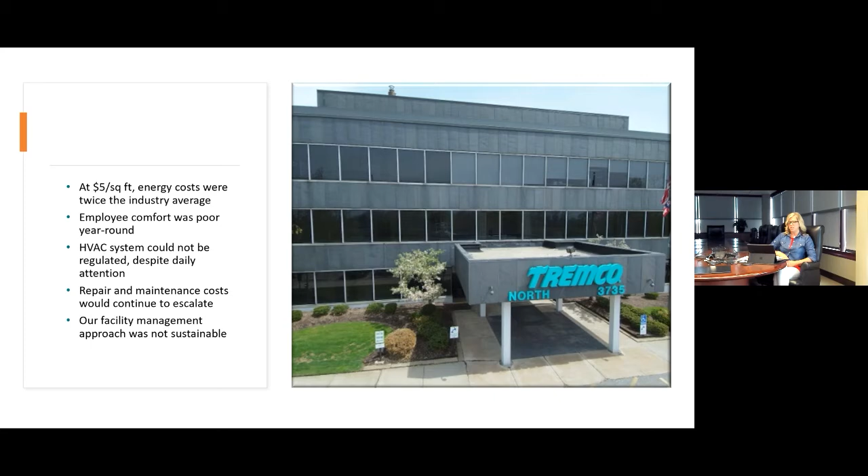So we knew we had to make some changes, and here were some of the goals: we wanted to reduce energy consumption, reduce greenhouse gas, improve employee comfort, extend the building life cycle, and achieve LEED Gold.

And so what we were able to do was do just that. If you're interested in learning more about that LEED Gold process, the information can be found online. We also have a great AIA-approved course that we can share on that whole process, and I think it's really great to see how it went. What's even more interesting is this was 10 years ago, so imagine all the improvements that can be made today, maybe even with technology that can assist.

Kevin, how much were you involved in the LEED portion of this restoration, or this renovation?

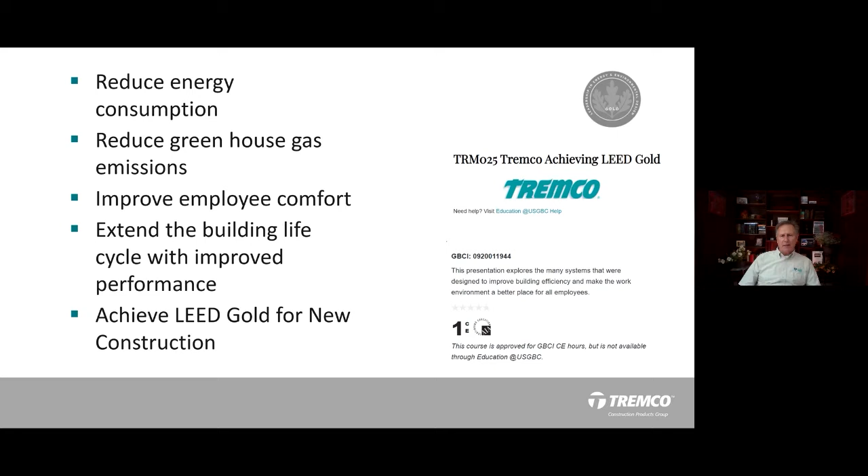Well, throughout everything—a lot—because everything we did had to be monitored and tracked. From hauling the trash away to recycling the slate, everything had to be tracked. I had to report to, I think it was URS, who was tracking it for us. So it was a good collaboration—they laid it out, but we reported to them on things that were happening.

And is this kind of reporting based on all the points and all of that? Did you get into that detail, or is it more just making sure you reported everything?

Well, no, we had to get into figuring out what points needed to be had. For instance, we had a bicycle rack—you get so many points for a bicycle rack, but in order to get those points, you had to have a shower. An interesting story was when I found out we needed to put a shower in, I had to go down into the basement and start measuring up this poor woman's office. She was looking at me like, what am I doing in here? I didn't have the heart to tell her she was going to lose about 5 feet of her office space. So it was total involvement, figuring out what the points were and then how we were going to achieve those.

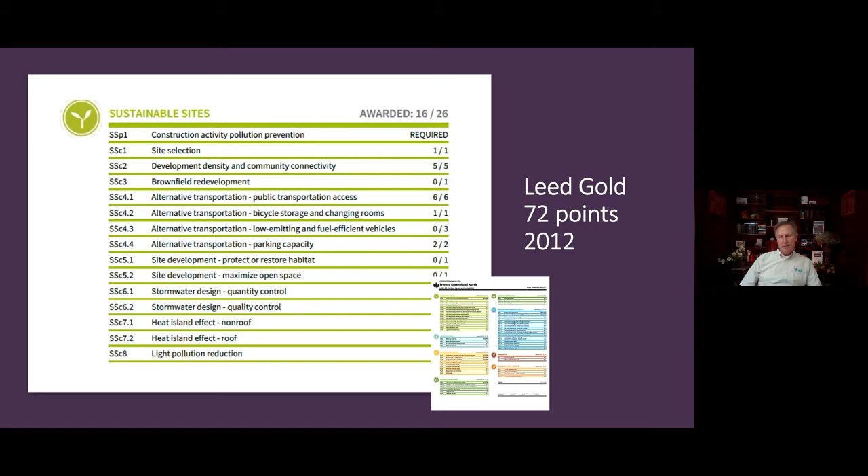So if anyone's interested in learning more, there's a whole scorecard available on the USGBC site. We did achieve LEED Gold—it was 72 points. To go platinum, you needed 80 points, so we were just shy of that. We were accredited for that in 2012, and I think the overall construction began in about 2010. It's pretty interesting—through the years, USGBC has gone through changes in their point systems, so if you aren't familiar with it, I suggest reaching out to them as a great resource for accreditation for your building.

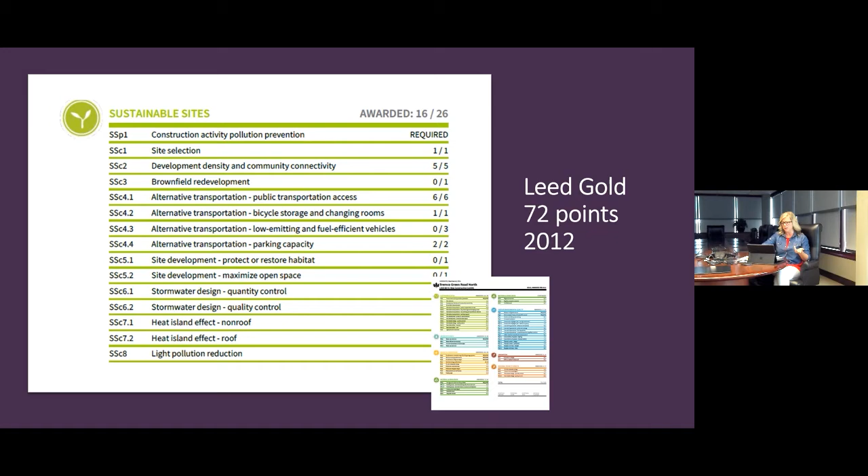So when we look at those retrofit results, we put a whole new Dryvit facade on. Before, if you remember, we had slate on steel. Now we have a continuous air barrier and moisture drainage plane. We took that building from having no insulation to now insulating it, and all that slate was reused as a walkway and on the vegetated roof. Were you involved in that part too, Kevin—the slate and how we utilized that?

To clarify, the slate on the lower portion where you see the windows stayed in place. Behind that was the steel structure covered with asbestos, so we had to deal with the asbestos attached to that space. The only slate we ended up using was on the penthouse, and that slate didn't have asbestos on it, so we had to be careful when we removed the asbestos on the lower portion.

The upper portion, the penthouse, had the slate that we took down, and that's where we made the walkway out of.

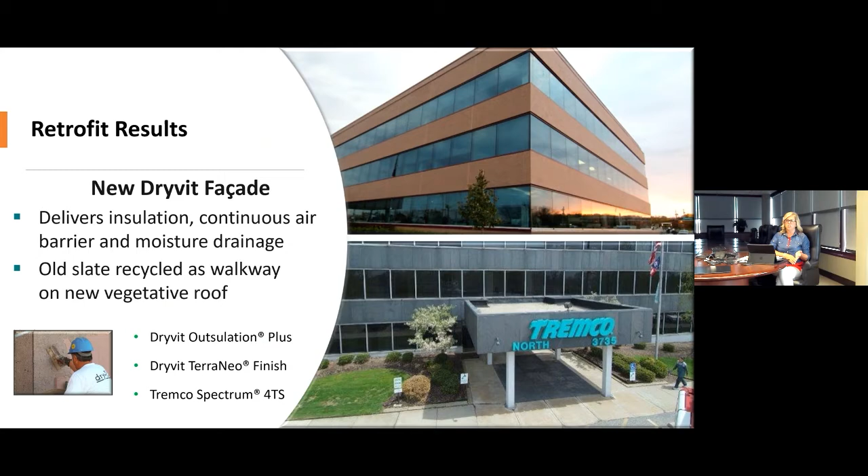Thanks for that clarification. I misrepresented that, because it would have been quite the job if you had to remove all the slate over the entire building to accommodate that. But this opens up all those capabilities as we look at existing buildings that are 40 or 50 years old, and how you can take that existing structure and give it a whole new look, not only aesthetically, but also getting energy efficiency, applying a continuous air barrier, and a moisture drainage plane, so you have a more functioning structure.

That was very helpful, and Dryvit was very helpful in that, because slate, if you don't know, has oils in it. So we had to do adhesion tests to make sure that what we were applying was going to stay. It was great with the sister companies coming in to help us out. Even Sealants came in and helped with the ETA for the windows, connecting to the slate before we put the Dryvit on. So it was a good collaboration from our sister companies.

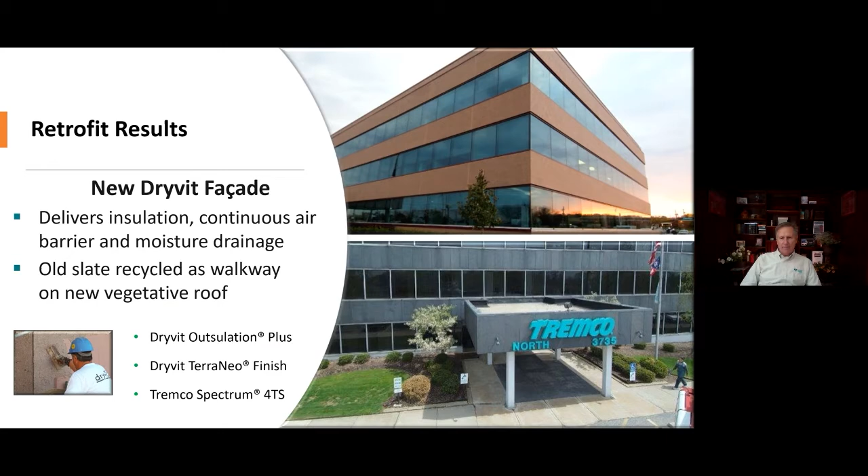I know you worked with a variety of different local contractors. Do you want to name a few that worked on this part of the project? Carroll Glass was the installer that we utilized. Kawneer was actually the window that was put in there, and the reason we utilized them is because they procure a lot of sealant material for their window systems. Kawneer was previously a partner with Sealants because they were buying our product to put into their window systems. The local installer, Carroll Glass, was the guys we utilized for them. The Dryvit people were Jess Sailor's group out of the Toledo, Detroit area.

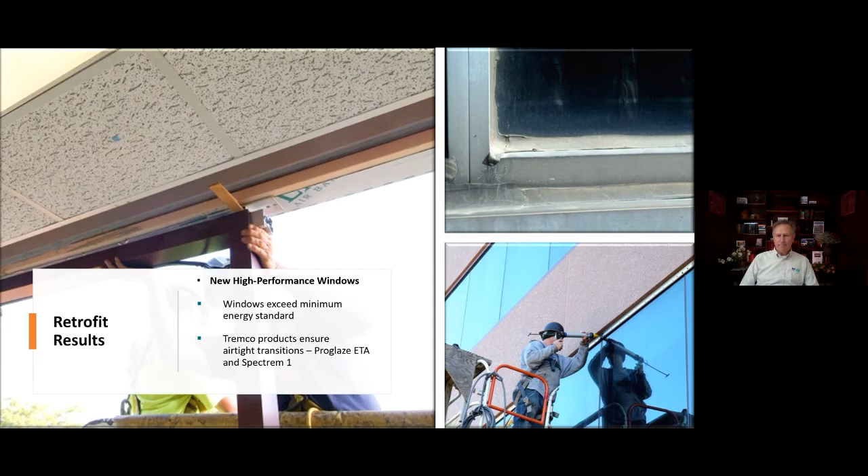Who's one of the better Dryvit contractors in the country. Wow, that's great. I wonder how they felt about utilizing our products on our building. That might have been a little uncomfortable for them, knowing we're watching their every move and also making the products.

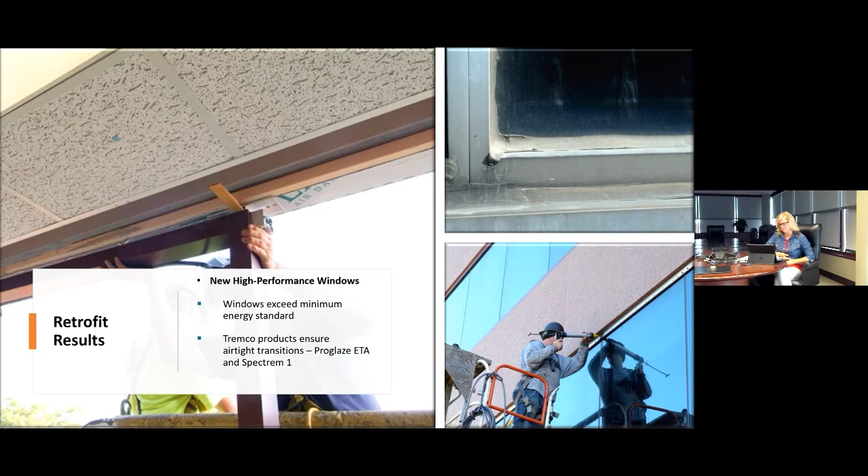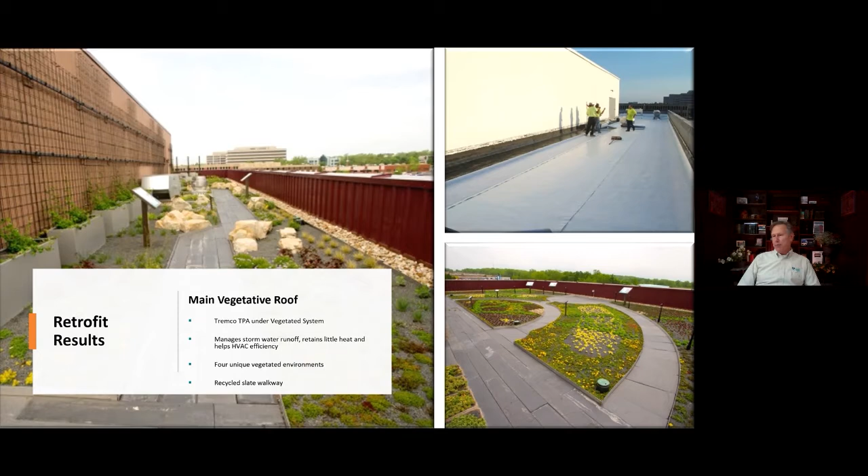One of the things to note is that we are capturing the water on that system. In a lot of areas now, you get assessed for hardscape - any water that goes into the sewer system, you're assessed based on the hardscape at your property. So by having a system like that, you're reducing the wastewater or the water that goes to pollute Lake Erie, which is a big help for the sewer systems.

Thanks for mentioning that, because that is a huge piece of it - being able to recapture it so we're not contributing to the wastewater.

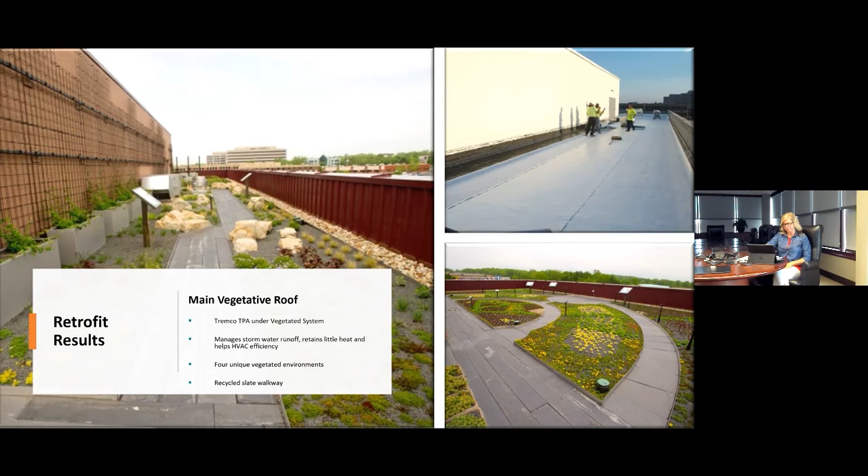Here's some more pictures of the roofing system, this highly reflective surface. Tell us what's going on here. This is on top of the penthouse. This is what I was referring to earlier, where we used several different systems so we could show our capabilities for different customers. This is a TPA roof that went on top of the penthouse.

Got it, so those pictures we just showed were the lower level of the roof, and this is on top of that area directly to the left of those pictures. Correct, just to have everyone understand that.

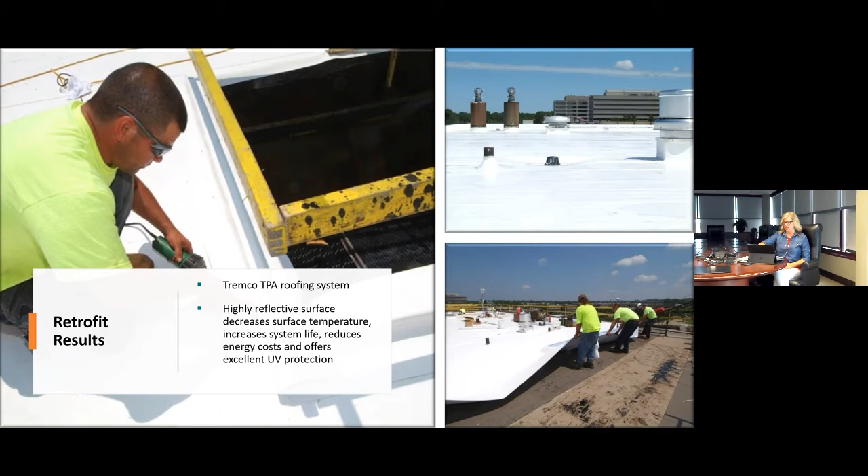As we continue on, some more pictures of the roofing system here with the Tremco Rock-It system. Correct. The one in the upper right-hand corner is the back canopy, and you're looking at the front canopy over in the lower right-hand corner there.

That's got that border around it, which will eventually be a vegetated roof. This is a great picture to show, as you would see on any type of construction site, the materials all around, the coordination—that was a key part of your job, the coordination and communication, as this was an active building, right? So the workers had to move off site during part of this.

What we had was two floors kept open at times, and then we moved one floor completely off site. We still had staff on site as we moved out, and eventually we ended up moving everybody out as we had to. At some point there was just one floor, and then we would move up and move people back in as we could. So it was a good coordination by the team.

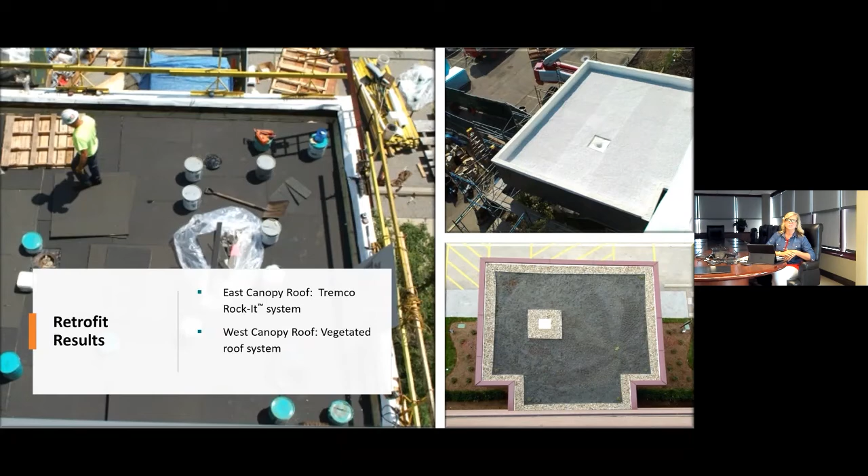That was the advantage of being able to use something like the Dryvit Outsulation, because you're going over that existing structure. So you moved people out when you had to handle the window part of it. Had you done more work to the exterior, we may have had to move people out even more often. That shows the feature of being able to add to that existing structure and get some additional performance so you don't have as much moving of that interior space.

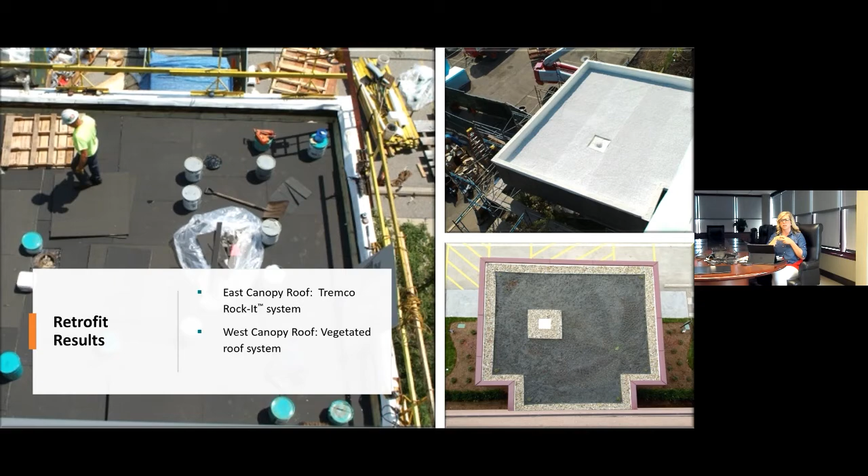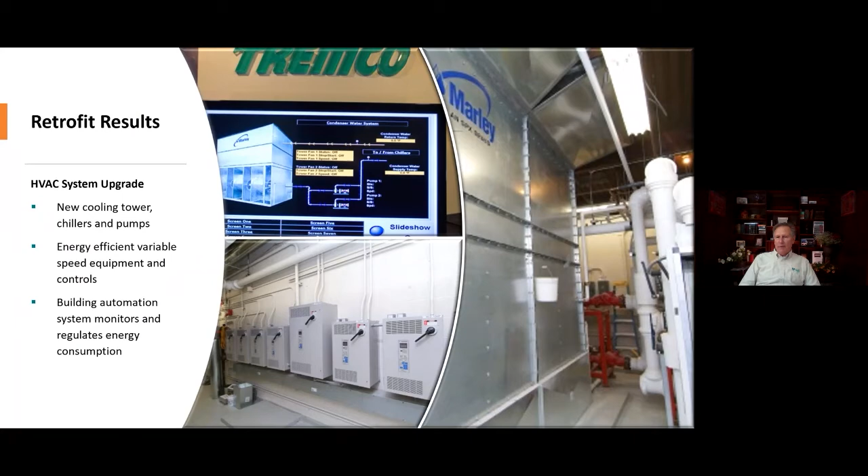Got it. And it was so interesting because right after we finished this, we took a lot of people through tours of these buildings. It was great to bring people through and explain this process. I think what's interesting is there's probably been a lot of people new to Tremco who may not have realized that all these retrofit steps were taken, and what this whole new building is able to provide to us in being able to talk about exactly how we can do renovation efforts in a structure.

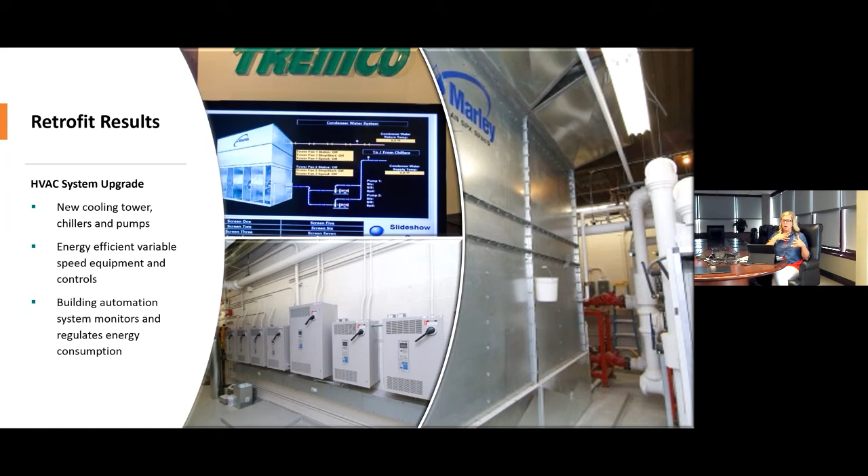So I know a lot of people were pretty excited about hearing this information directly from us today. Some of the questions coming in are about just that—what do you feel is the biggest design challenge, or the biggest lesson learned through this whole experience? I figured we'd answer that question real quick as we're going through these slides.

The challenge, from what I got, was what do we, as the end user, want the building to look like? How do we want it to operate? What do we want it to show? With us, we wanted it to be more like a showroom—here's what we can do. So I think we accomplished that.

One of the things we couldn't do was put a wind turbine up on the roof. In order to do that, going down into the structure would have cost a lot of money. So we wanted to put it up there, we looked at the cost, and we decided the best place to put it was in the back of the parking lot.

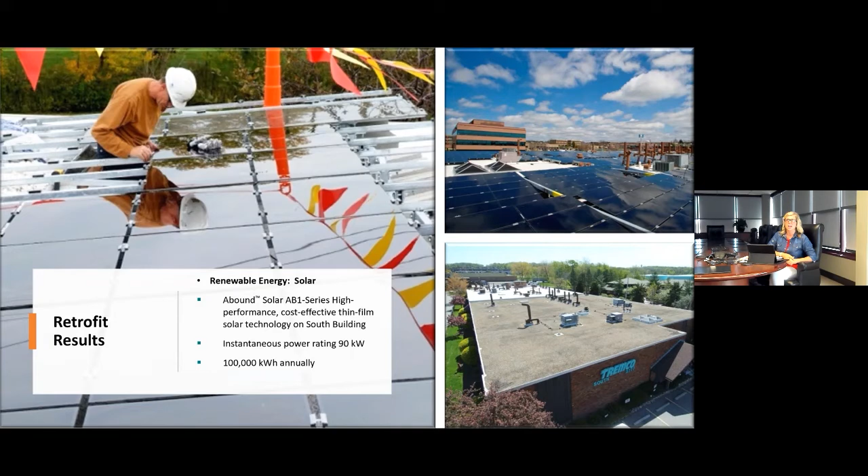So it was a team effort all the way from the top, all the way down to the guy sweeping the floor. Understanding that whatever that end goal is—I know right now many of us are working on different types of retrofits and renovations—I think that's a key part of it, making sure we're all on the same page about what our end goal looks like.

And I know this was part of it, right? We wanted to make sure we had some renewable energy. You mentioned the wind turbine, but there were also these solar panels. I know we've done a lot of work in terms of the clip systems that exist. There's probably been so many improvements—this was done between 2010 to 2012, so that's why we're celebrating our 10-year anniversary of that renovation. But I'm sure there's even more improvements you've seen through the years with different types of clip systems. Yes.

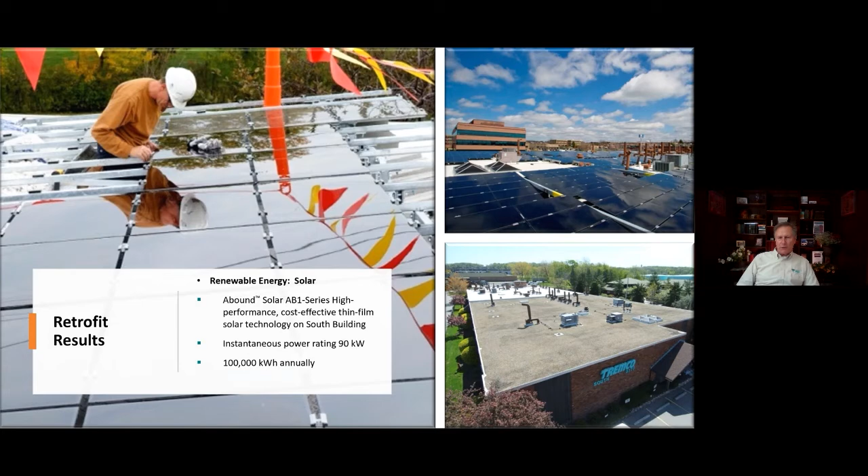With the clip system, we looked at the solar panels too, and that's where our method comes in—we go cradle to grave. The construction manager goes out with the engineer to look at the structure, so they're there from concept through implementation. We're out at the very beginning with the engineer, getting the drawings, crawling up in the ceilings, looking at the structure. Then when we're with the worker bees on site, if the engineer isn't there, we can help answer questions because we've gone and looked at everything with the engineer already. I think that's a key part.

So, Kevin, this whole month of July we've been focused on connectivity—how important that is to the overall performance of your structure, picking the right products, making sure they're tested as assemblies. The last thing you'd want to do is put in a clip system that isn't going to perform, or that introduces a lot of holes or issues in your building.

Thank you for bringing that up, it's perfect messaging on connectivity. We always have to think about what's coming next and how that affects existing systems. We had a conversation yesterday where a question came up about how we handle solar power, and whether we have experience with that. Thanks for bringing that up—yes, we do, and that's something we like to be part of, that whole cradle to grave approach across every aspect of the renovation project.

We talked a little about capturing renewable energy from a rainwater harvesting perspective in that catch basin. There are 6 cisterns that store 15,000 gallons of water for reuse. I know you touched on this already, but I'm sure there's more you'd like to add at this point.

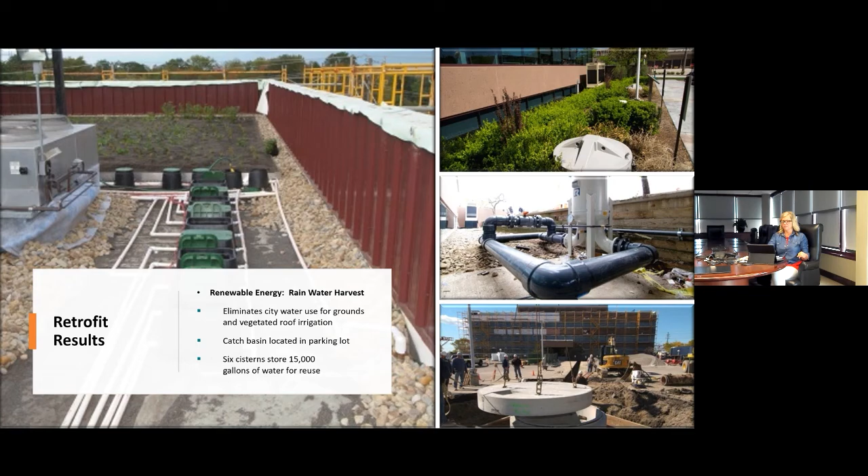And then daylighting—as we looked at the whole sustainability approach and LEED Gold, we knew there were improvements we could make for daylighting as well. We wanted to diffuse natural light and reduce our dependence on electric lights. Even in the room I'm in today, we've got great big windows—I actually have to close the blinds because it's so bright and sunny. What you're looking at is a stair tower that was added to the south building.

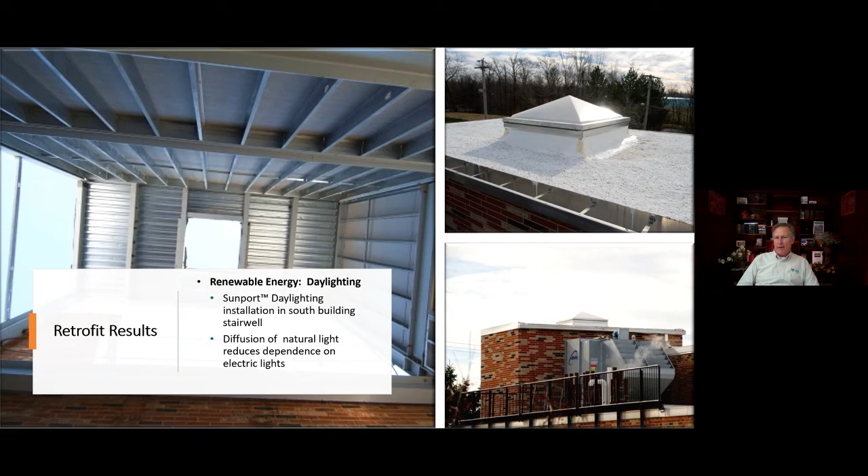That brick on the lower right-hand side is actually Dryvit. On the interior of that, we used Fibergrate as the stairwell. So what looks like brick is really not brick - it's one of our sister companies' products, a Dryvit product.

Right, Dryvit is obviously part of the Tremco Construction Products Group. Just one more example of the versatility of using those Dryvit products in the EIFS system, making it look like existing brick is a huge advantage.

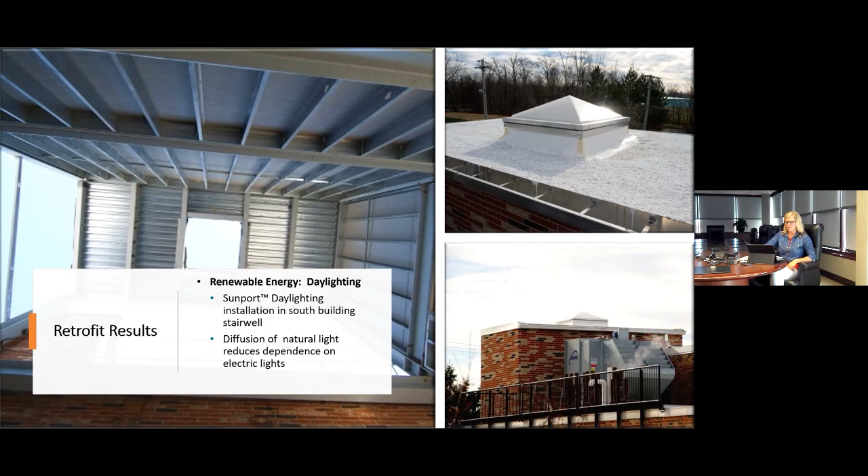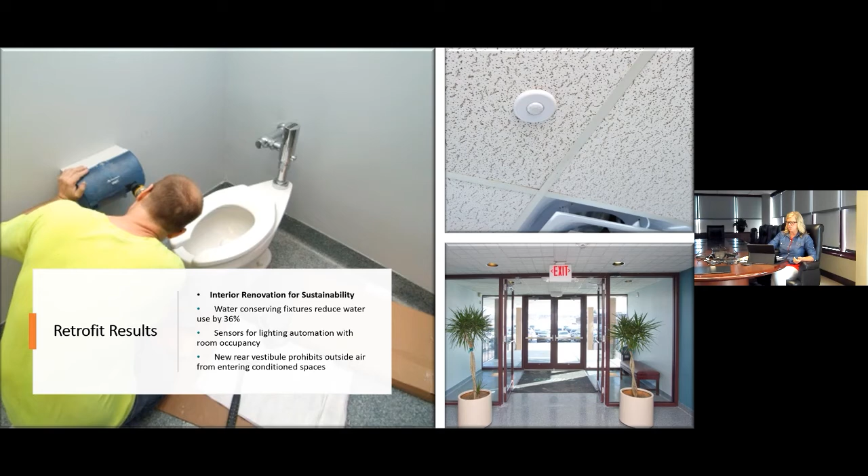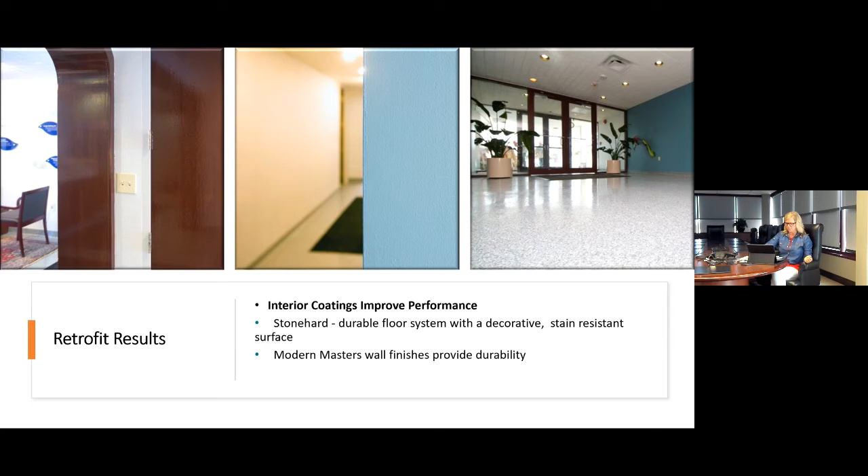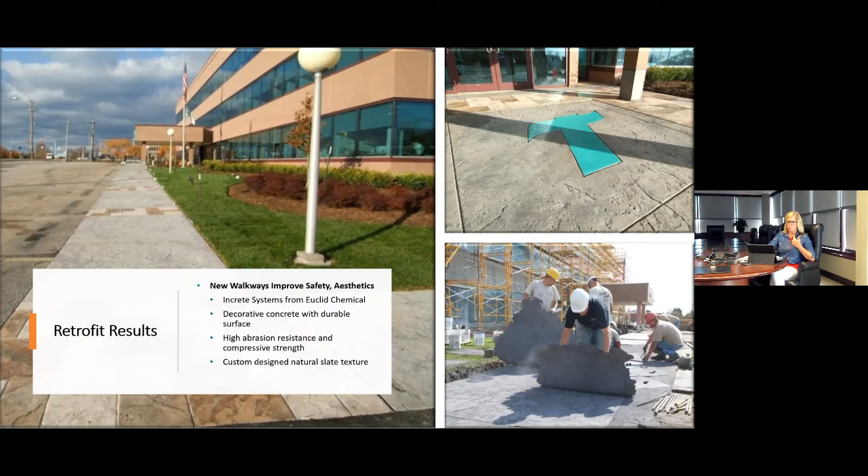And then, of course, there was a lot of restoration and renovation on the interior space, being able to put vestibules so that outside air doesn't easily enter the conditioned space. We had a lot of improvements on the flooring - we used Stonehard for their flooring system, some Modern Masters for the wall finishes. And of course, here's some of the aesthetics, pictures of the walkways, some of the work going on in the walkway, and the big slate front entryway with the Tremco T was a big part of all of that.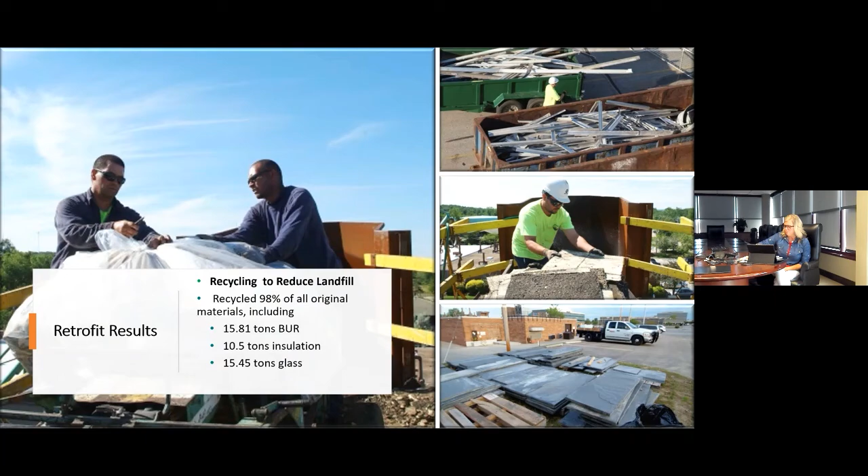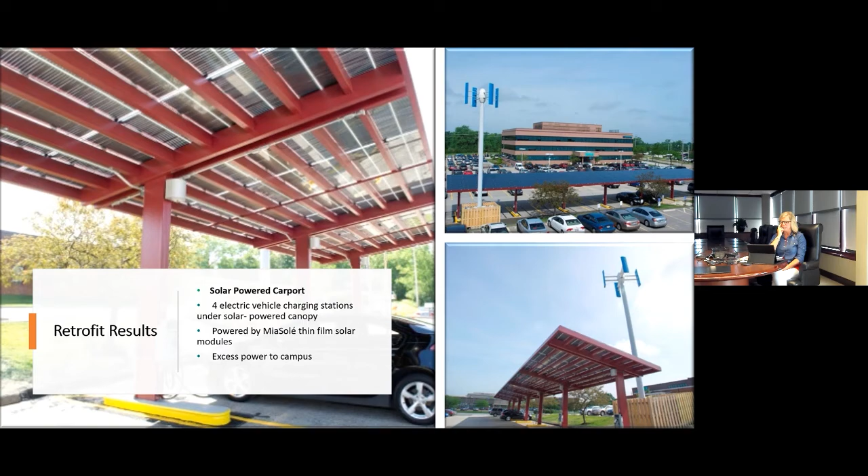We also had a solar powered carport, and back then we were like, come on, but we definitely have cars in the parking lot that plug into that on a regular basis, so we're utilizing different types of energy, collecting it solarly.

I think what's interesting is the building as it is today. I mentioned we used to do tours on a regular basis, and we'd still love to do that when we're able to have people through our facility. It always starts off with telling the story of the Tremco Incorporated headquarters here in Beachwood, and how important it was for us to invest in our own building and see those improvements in energy efficiency. We're able to walk people up through our staircase and show them that progression.

So this is a very quick video - I did it as a time lapse. I'm certainly not making it up the stairs that quickly, but imagine as you come to our facility today, 10 years later, seeing these improvements still working, still affecting our workability here in our facility. So let's take a quick look at that.

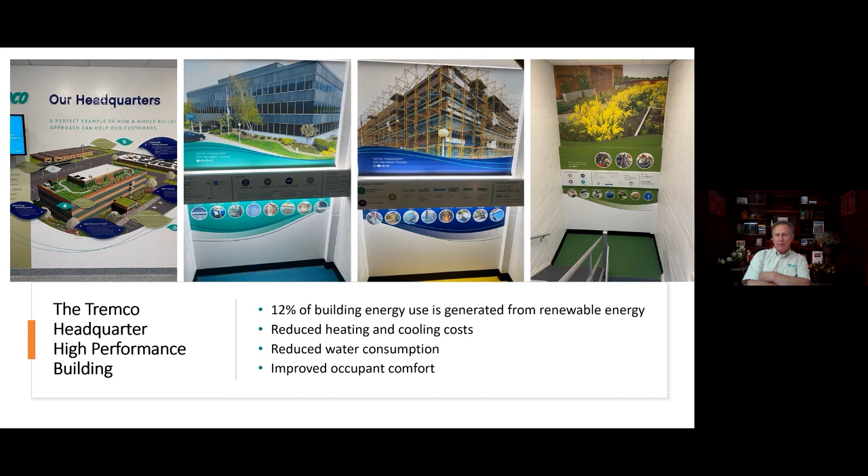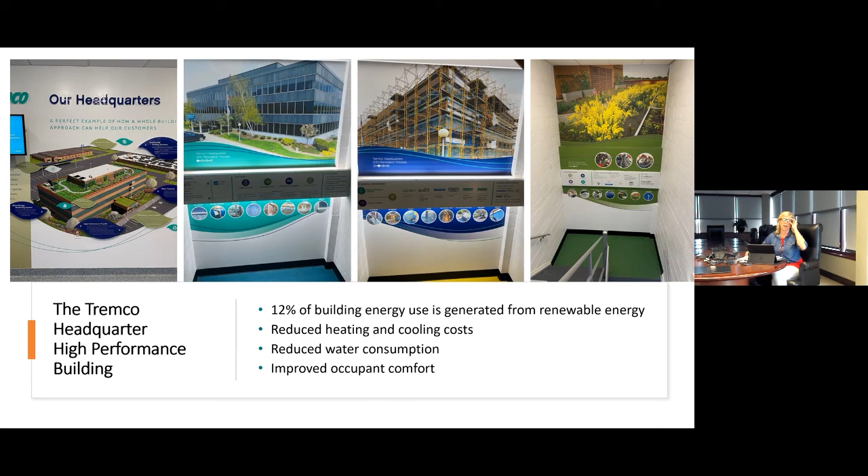Yeah, and I think Larry Lurkey mentioned it on a previous segment about Tremvision, and that capability of being able to watch that progression. And I know we didn't have the drone program back then, right? Now we have drones that can go in, and I've been on jobs where drones are actually looking at your work as you're progressing too. So you're right, having those capabilities is ever more so now today than it was 10 years ago.

I wanted to make sure I introduced this concept. We talked about LEED Gold and how that was a goal of ours when we started this renovation back in 2010. But the Department of Energy, Oak Ridge National Labs, does have a building envelope campaign. They just launched it in June. So this is a call to action for anybody watching to participate in their building envelope campaign. They're welcoming members in different stages, either participants or supporters, and they're looking at giving accreditations to buildings that are seeing this energy savings.

There's an assessment tool you can see online. It can be either new construction or retrofit. It has to be a building completed since January of 2019. So this is a brand new thing for people to look at and investigate. And many of us at Tremco participated in this building envelope campaign. There are webinars on it. We thought right away we wanted to take a look at our energy bills, to see how our renovation project's going. And we're very proud to say that we're continuing to see those energy savings year after year, even 10 years in.

What's most amazing as we close today is we have so many more opportunities now to apply options to meet everyone's need with our Tremco Construction Products Group. Dryvit was a huge part of this project, being under the Tremco brand. We've got the Dryvit brand, Nudura, so if we needed to add on anything, we could use insulated concrete forms, and of course WillSeal to provide expansion joint materials that are also insulated. And of course, as always, the commercial sealants and waterproofing team, the roofing team, and WTI.